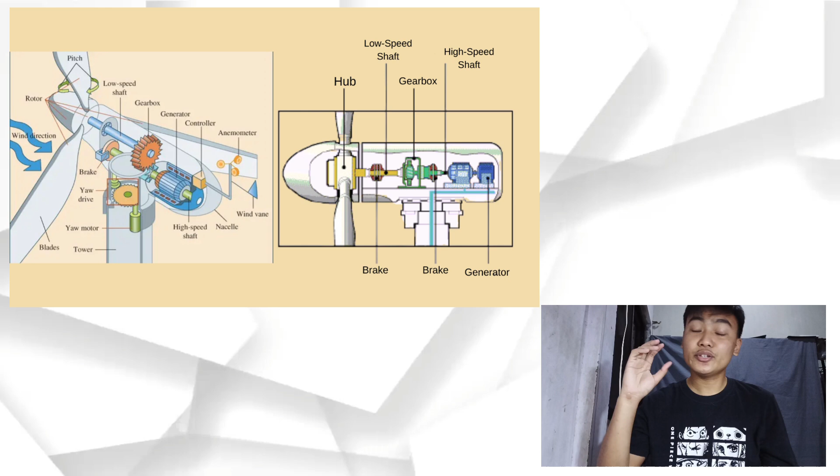Let us take a closer look at the wind turbine. We have here the rotor, which has these parts: the blades and the hub. The blades are connected to the hub, which is also connected to the nacelle part of the wind turbine.

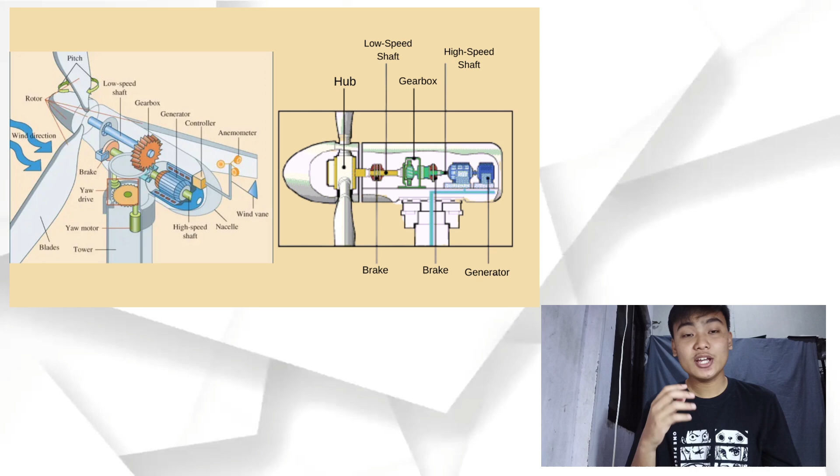If we zoom in and look closer at the parts of the nacelle, we could see clearly where it is connected to. Here is a close-up view of what is inside the nacelle. We have the hub where the blades are connected, and it is connected to a low-speed shaft which is connected along the gearbox, where the gearbox is also connected to another shaft leading to the generator, where the energy is produced in the wind turbine.

Let us talk about the wind turbine operating principle, how the wind turbine operates. As you can see, the wind turbine is a type of renewable energy. It means that the energy comes from natural resources, like the sun from a solar panel and the wind, which is in the wind turbine. That renewable energy that the wind turbine harnesses or gathers is what is produced as electricity.

So how does it work? The wind turbine uses a rotor, just like what I showed you earlier, where the blades are connected on the hub, and the blades are the ones that collect the wind. When the wind passes through the blades, it rotates. Basically, that rotation is transferred to a generator, which is connected along the shaft, that produces electricity. So that is the very basic concept of a wind turbine operation.

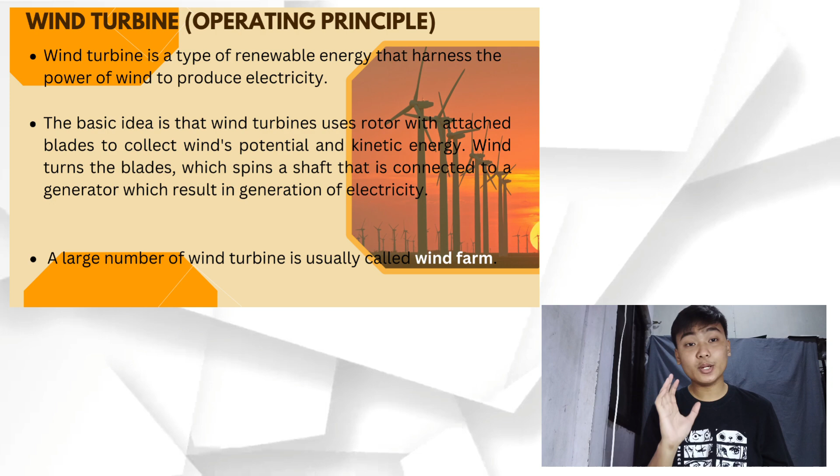Let us proceed more to the parts and operating principle of the wind turbine. Let us take a closer look at this image, isolate it, and discuss it one by one. Let us start with the very basic and main part of it, which is the blade. The blade is the part that rotates due to the force it catches. When the wind passes through the blade, it spins it, and the blade is connected to the hub, which is also connected through the low-speed shaft.

That low-speed shaft is connected through a gearbox, which amplifies the rotation that the wind gives to the wind turbine. Then there is another shaft called the high-speed shaft that is connected to the generator, where it spins the generator which generates electricity. That is how electricity is produced from a wind turbine, specifically from its part which is the blade.

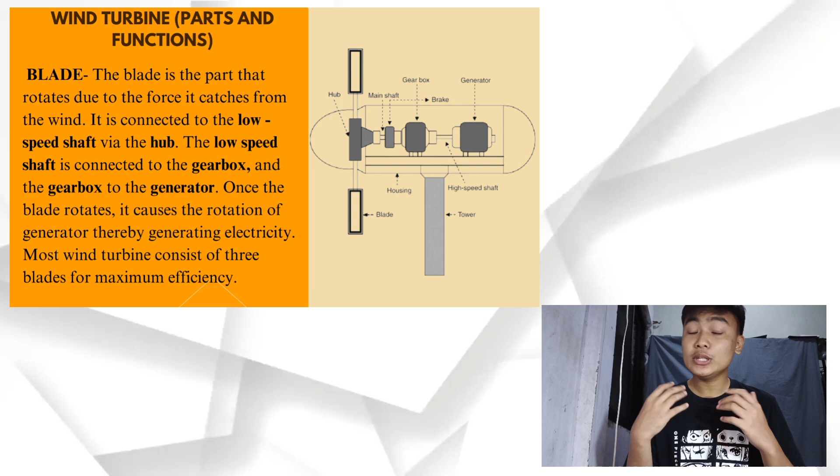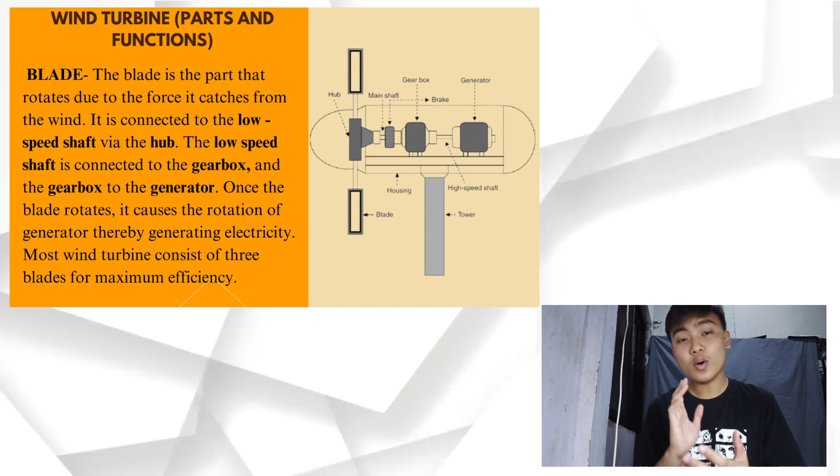And if we want the most efficient method of using blades in a wind turbine, we must use only 3 blades. So why is it? The next reporter will discuss why 3 blades is the most efficient maximum number of blades.

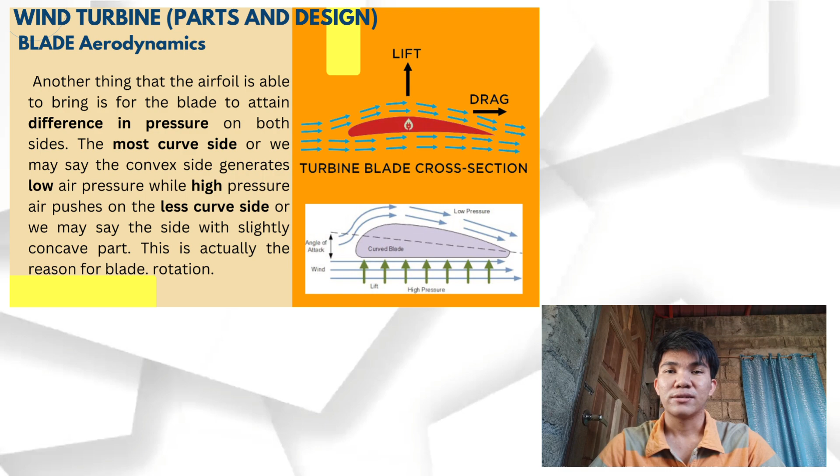So, here's the question. Based on the figure illustrating the optimum angle of attack, which part of the blade is the leading edge and the trailing edge of the blade? It could be the front or the back.

In the image, the leading edge is the curved forwardmost point of the airfoil. This is the part that initially meets the relative wind. The trailing edge is the rearmost point of the airfoil. This is the point where the airflow separates from the surface. Therefore, the leading edge is the front and the trailing edge is the back.

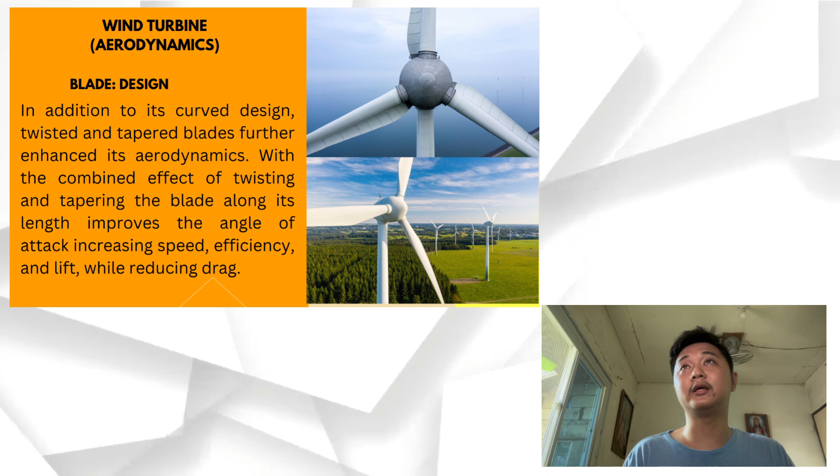Wind turbine number of blades. Here is now the question: based on the previous slides, what number of blades is the best design in consideration of all factors, construction and operation of the wind turbine?

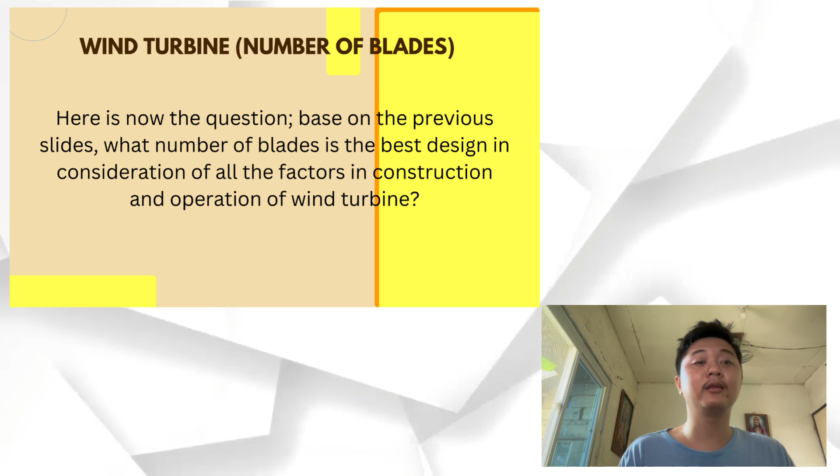Wind turbine number of blades. Now we know that the rear of the blade is more curved than the front. This varied shape causes a pressure differential as the wind moves across the blade, which causes the blades to move.

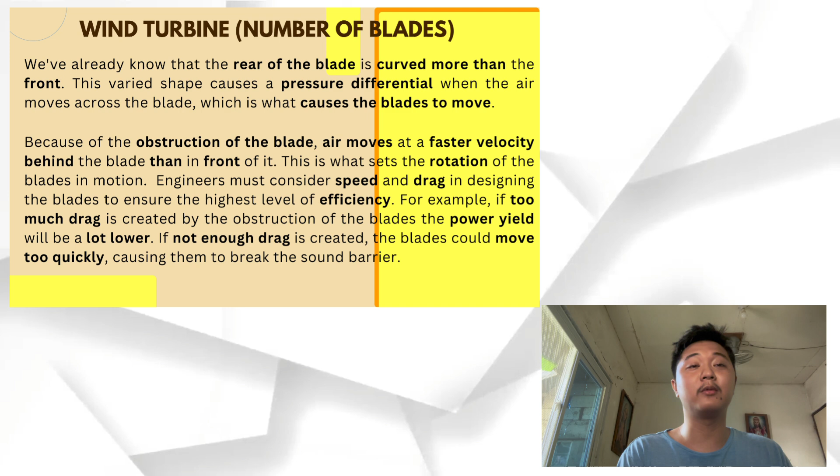Engineers consider speed and drag in designing the blade to ensure the level of efficiency. For example, if too much drag is created by the obstruction of the blade, the power yield will be a lot lower. If not enough drag is created, the blades could move too quickly, causing them to break the sound barrier.

Wind turbine, number of blades. The rule of thumb is the fewer blades, the better. Mas kaunting blades daw ay mas better since less drag and increase in efficiency. The number of blades increase the torque and reduces the optimum rotation speed. Having fewer blades reduce drag. Mas kaunti yung blades, mas kaunti din yung hatak.

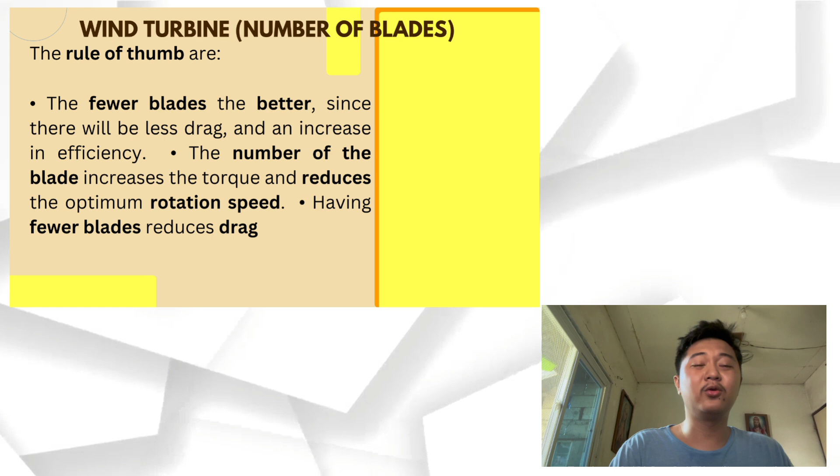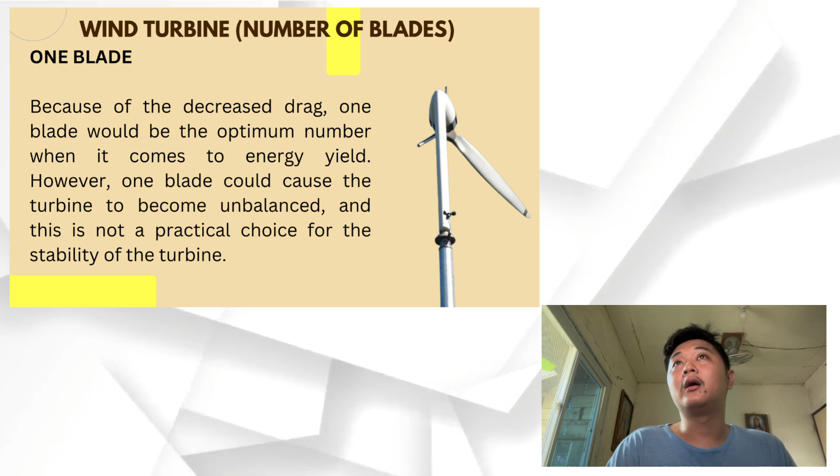Wind turbine, one blade. Because of the decreased drag, one blade would be the optimum number when it comes to energy yield. However, one blade could cause the turbine to become unbalanced. Kapag isang blade na turbine, mas unbalanced siya at hindi practical para sa stability ng turbine.

Wind turbine, number of blades, 2 blades. At first glance, two-bladed turbine seem like the optimal configuration for wind turbine. Perfectly balanced, and with one blade less than 3-bladed turbine, they will generate less drag. So why are not all turbines made with 2 blades?

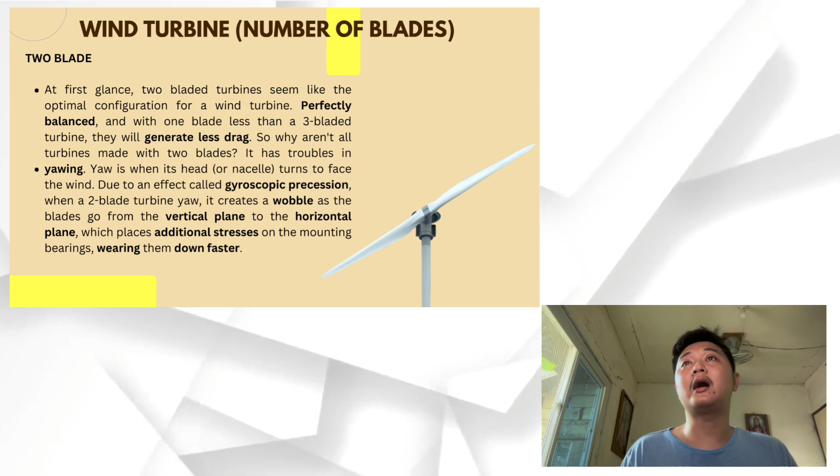Dahil may trouble daw ito sa yawing, and yaw is when its head or nacelle turns to face the wind, yung pagharap daw sa hangin, due to an effect called gyroscopic precession. When two-bladed turbine yaw, it creates a wobble as the blades go from vertical plane to horizontal plane, which adds additional stress on mounting bearings and wears them down faster. Mas nagkakaroon daw ng stress yung bearings ng wind turbine at mas nakakasira daw ito ng mas matulin kapag 2-blade.

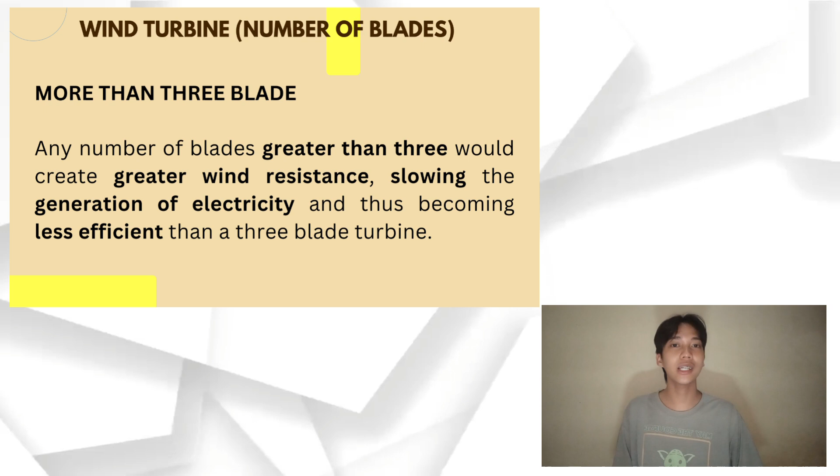So ano yung mangyayari kapag nag-add ng more than 3 blades ang turbine? Diba as mentioned earlier na the fewer blades, the better, since there will be less drag. So kapag nag-add ng blade, ang mangyayari ay babagal yung rotation. Yung drag force madadagdagan dahil may panibagong blade. So babagal yung ikot, makes the generator slower. Kapag mabagal ang generator, yung electricity na gine-generate ay mababa o hindi gaano kataasan. So less efficiency, hindi maganda na mababa lang yung power na nakukuha sa turbine. Parang nagsayang ka lang ng pera for the blade o for the turbine, tapos hindi naman maganda yung results. So hindi desirable ang maraming blade. For these reasons, turbines designed with 3 blades are the ideal.

Nasabing ideal yung 3 blades dahil mas stable o sakto o balanse yung blade sa pag-ikot, so make it more suitable for the turbine. Malay natin sa future, diba, mababasan pa yung blade o mas magiging ideal pa yung dalawang blade. Malay lang natin, diba, edi mas maganda, baka mas matipid o low cost yung aabutin.

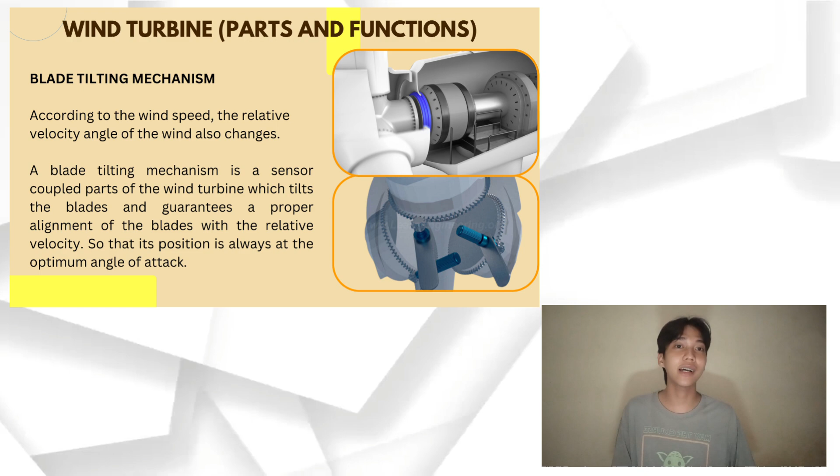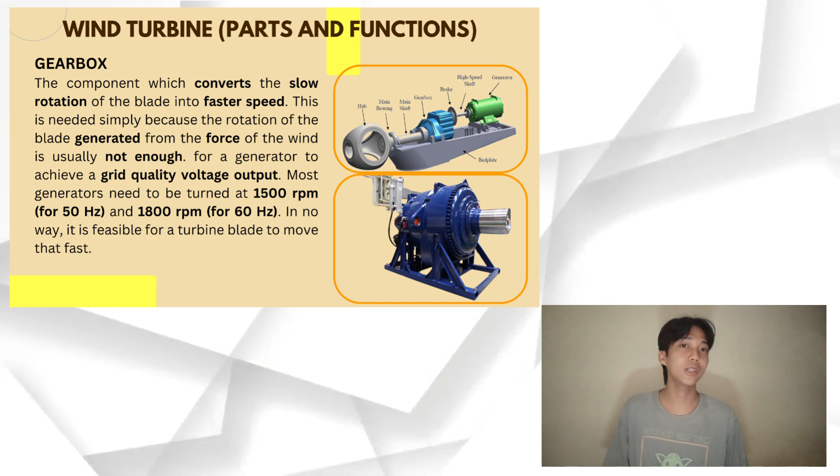Next, gearbox. Ginagawa ng gearbox ay kino-convert yung slow rotation ng blades into a faster speed. Kasi di ba yung ikot ng blade ng turbine ay di gaano mabilis. So ngayon, yung ikot ng shaft ay di enough for generator to achieve a grid voltage output. Most generators need to be turned at 1,500 RPM. So can you imagine kung gaano kabilis yung rotation na kailangan ng generator? Kung yung blade mismo yung gagawa niya, napaka-imposibleng mangyari. Ang laki ng blade tapos mabagal lang yung ikot na kayang gawin ng blade. So ngayon, dito na tatrabaho yung gearbox. Yung common ratio is about 90:1, so yung isang buong ikot ng blade, nagagawang 90 ikot ng gearbox with a rate of 16.7 RPM na input from the rotor, and yung output nito is 1,500 RPM na dadaan sa gearbox for generator.

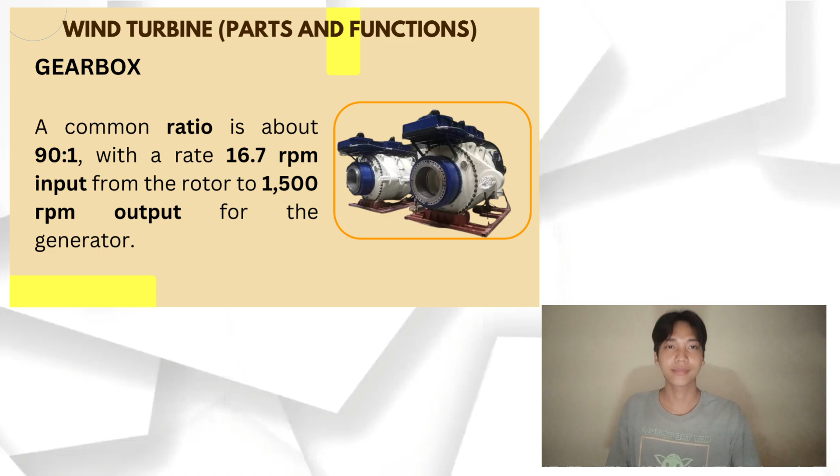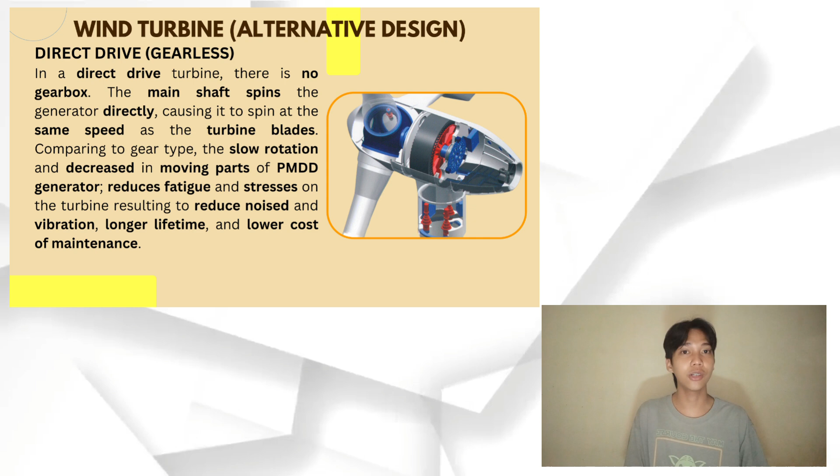Next is direct drive. Pinagkaiba lang nito is wala siyang gearbox, direkta na siya sa generator. So kung ano yung spin na nagagawa ng blade, yun din yung ikot na ginagawa ni generator. Comparing to gear type, the slow rotation and the decrease in moving parts of PMDD generator, dahil nga mas mababagal lang yung ikot ng shaft, yung lifespan ng turbine mas tatagal. Mas mababawasan yung noise, vibration, and stress, so it makes na mas mababa yung cost of maintenance.

An important fact, due to wind inconsistency, gear type turbine o yung may gearbox often operates at partial loads. So the efficiency of PMDD generator excels even in these conditions. Diba sa direct drive turbine, yung rotor nakadirektang nakakabit sa generator. Kung ano yung lakas ng hangin o yung ikot na nagagawa ng blade, is yun lang din yung ino-operate sa generator. So dito ngayon papasok yung magnet, dahil ang direct drive turbine gumagamit ng generator na may maraming magnetic poles. Nang sa ganon, yung mabagal na pag-ikot is sapat na to generate electricity.

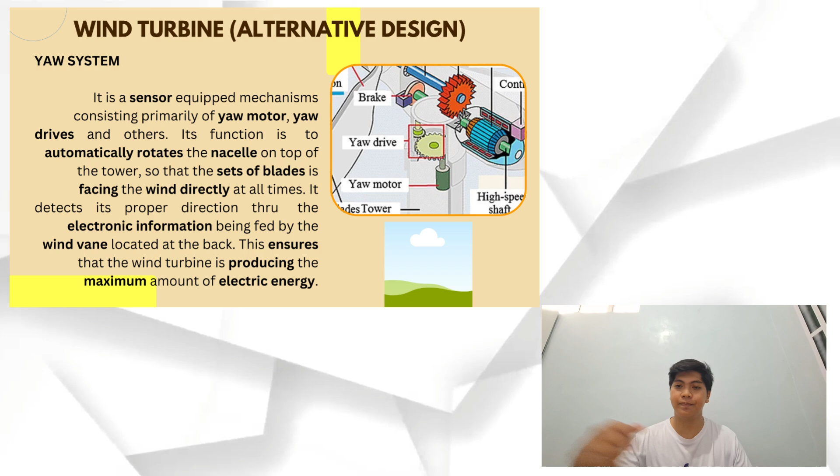How does a wind turbine work? You've probably seen a wind farm. But do you know how wind force is converted into electrical energy? We are going to show you how a wind turbine works.

Each wind turbine has a wind vane at the top that indicates the wind direction. This allows the turbine to rotate on the tower and face the wind. The blades also rotate on their axis for maximum resistance. Wind force, that is, the kinetic energy contained in moving air currents, spins the blades. These are designed to fully capture its energy.

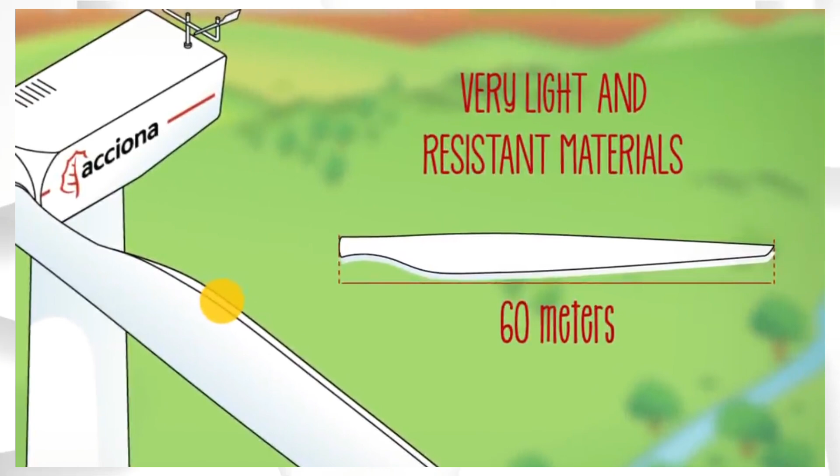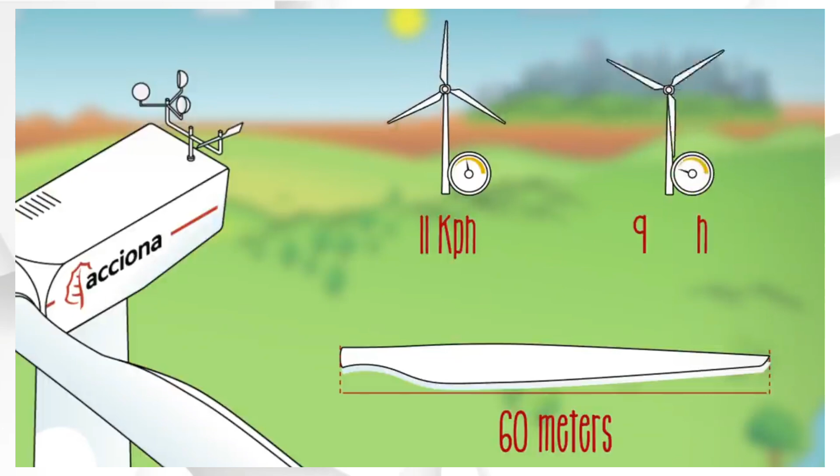They can be as long as 60 meters each and are made of very light and resistant materials for ease of movement. This is why they can produce energy even with very light winds, starting from about 11 kilometers per hour. With very strong winds, above 90 kilometers per hour, the blades are placed in the feathered position and the turbine stops spinning for safety reasons.

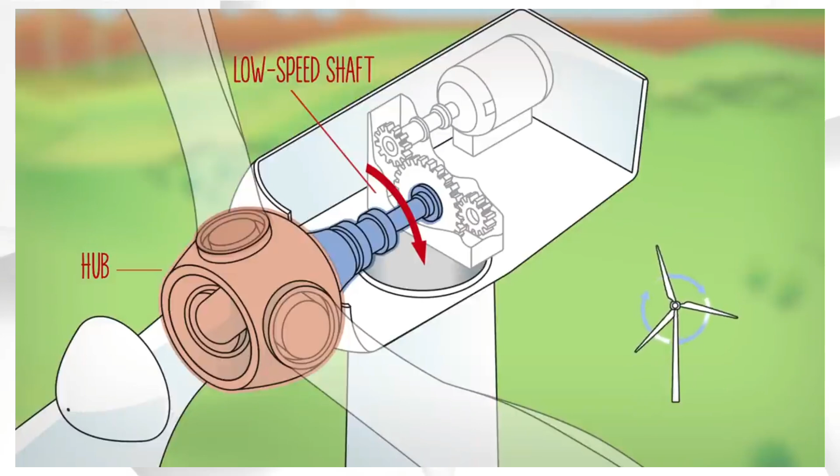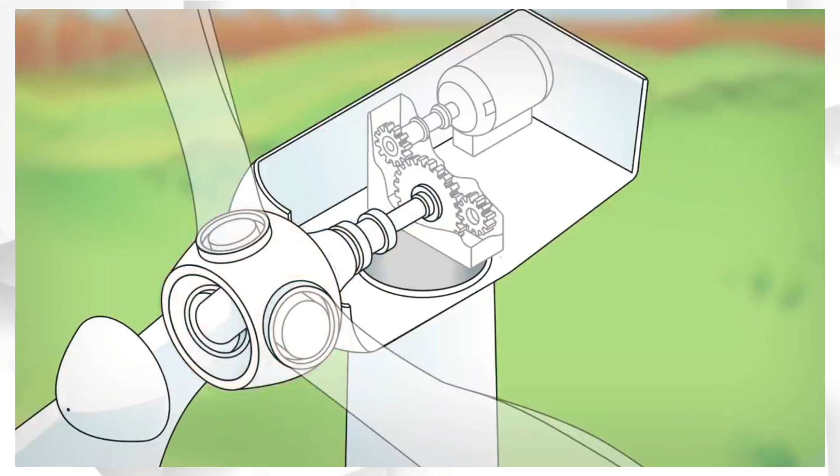The blades are attached to the wind turbine through the hub, which is coupled to the low-speed shaft. The low-speed shaft is given this name because it spins at the same speed of the blades, between 7 and 12 revolutions per minute. To produce electricity, it is necessary to increase the turning speed of the low-speed shaft.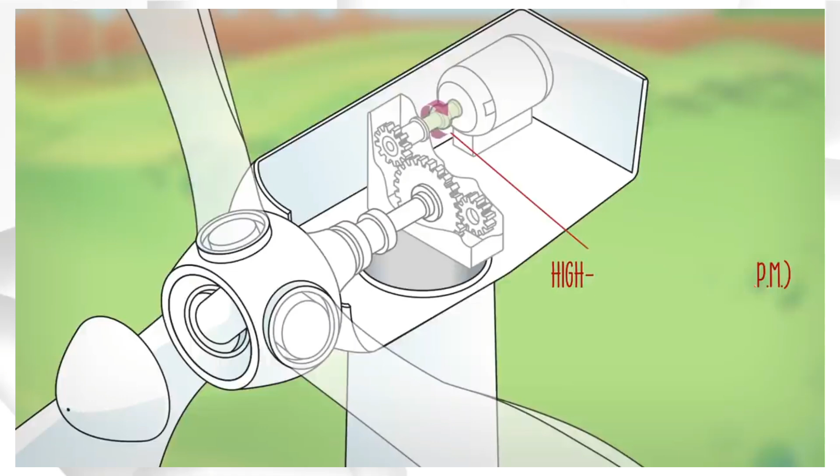That is the mission of the gearbox, which raises the speed over 100 times and transfers it to the high-speed shaft. The high-speed shaft, that rotates at up to 1500 revolutions per minute, is connected to a generator. The generator converts the kinetic energy into electricity, a source of energy that is easier to transport and use.

The electricity produced in the generator is conducted through the interior of the tower to the base. There, the transformer raises the voltage for transport inside the wind farm. From each turbine, alternating current is sent to the substation through underground cables. Here, the voltage is increased again to feed it into the power grid and transport it to end consumers.

This is how we use the wind to light cities, feed industries, schools or hospitals, or operate our household appliances in a clean way. So how did we get from this to this?

In some ways, the answer just boils down to climate change. We need way more renewable energy, so it makes sense that lots and lots of engineering and economic resources have gone into improving and enlarging windmills.

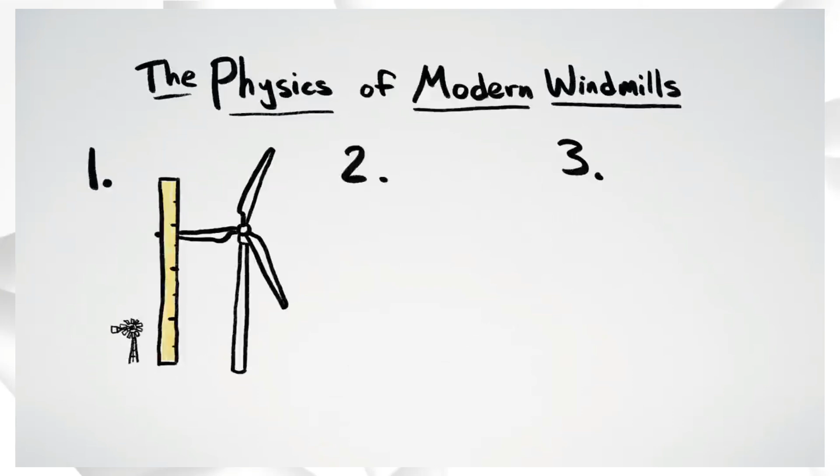But while climate change can explain why windmills have pushed towards really good design, it doesn't explain what makes a design good. I see three main features to explain: the size, the number of blades, and the shape of the blades.

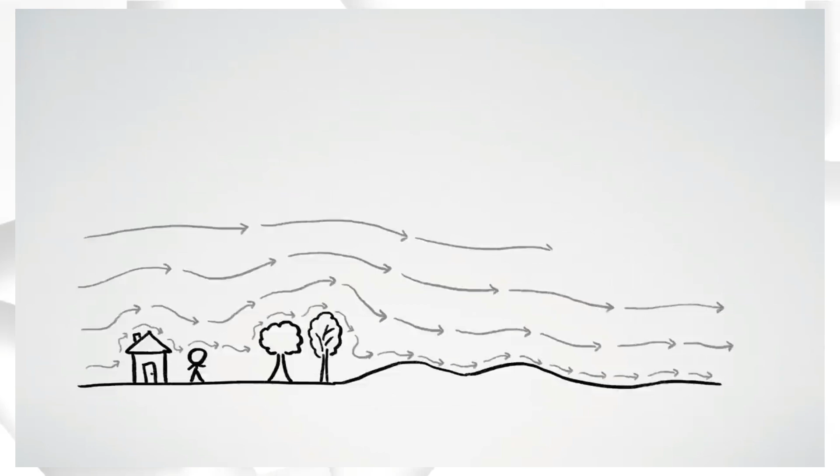Size is easiest. The bigger the area, the more wind you can use, and therefore the more wind energy you can capture. Plus, the higher up you go, the less the wind itself is impeded by stuff on the ground, the faster it blows, and therefore the more wind energy you can capture. So for a windmill to have access to air with a lot of energy, it should be giant and tall.

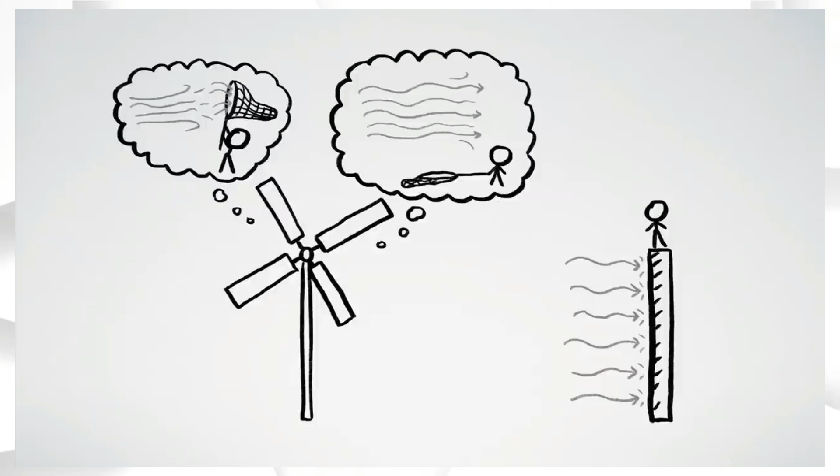However, a paradox of windmills is that they need to capture energy from the wind while also letting the wind pass. If you extracted 100% of the kinetic energy from the wind, it would stop moving and there'd be nowhere for incoming wind to go. So you have to let some wind through. Calculation shows that a mathematically ideal windmill can only extract 59% of the wind's kinetic energy.

Since windmills can't block the wind too much, they're faced with a trade-off: either have fast-moving blades that cover a small amount of area, or slow-moving blades that cover a large amount of area. This is because just as an airplane wing produces more lift the faster the plane is moving, a windmill blade catches more of the wind the faster it's moving.

So roughly speaking, a fast-moving windmill, like modern ones, needs correspondingly fewer, thinner blades in order to not slow the wind too much, while a slow-moving windmill can have more, wider blades. Obviously, modern windmills have gone with the narrow, fast approach. So why are modern windmills designed to spin more quickly than old windmills? If slower were better, there would be no reason modern windmills couldn't look like giant high-tech sails.

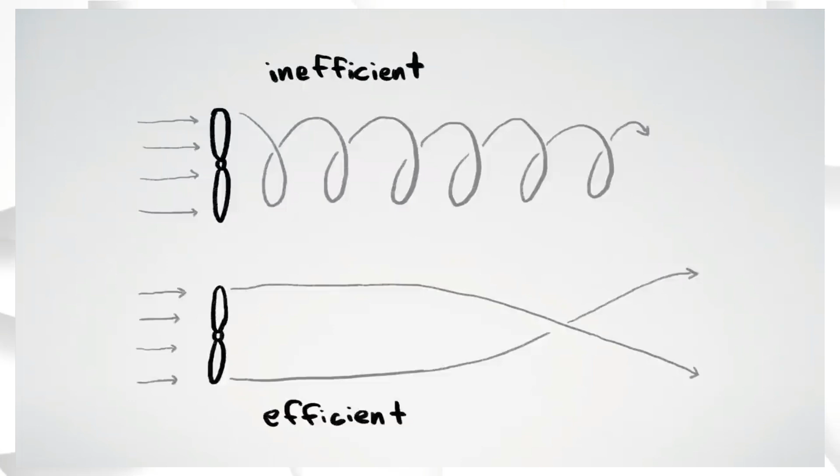The answer comes from Newton's third law. Just as the wind pushes the blades sideways to turn them, so the blades push back on the wind, giving the air a reverse twist and hence some rotational kinetic energy, which is energy the windmill doesn't capture. So the most efficient windmill will give the wind the smallest twist possible. And you guessed it, the faster a windmill blade moves, the less rotational energy it gives to the wind.

This might seem a little counterintuitive, but a similar thing happens when a ball falls and bounces off of an angled block. If the block isn't moving, conservation of momentum and energy mean that the ball bounces to the left and the block gets pushed right. But if the block starts off moving to the right, it's able to absorb more of the ball's energy when it accelerates. The faster the block moves, the more energy it extracts from the ball. You can see this because the ball moves less each time.

Windmill blades are a bit more complicated, but it's roughly the same idea. For decent efficiency, a windmill blade should move through the air at least 5 times faster than the incoming speed of the wind, though obviously different parts of the windmill blade are moving at different speeds, and so the shape varies along the length of the blade.

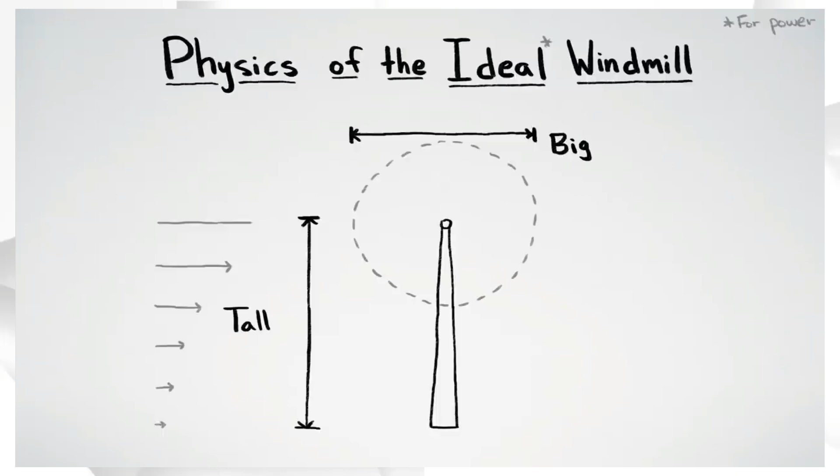So, in summary, an ideal power-generating windmill is big to capture a lot of wind, tall to capture strong winds, fast-moving to be most efficient, and narrow-bladed because a fast-moving windmill needs to have a smaller blade area, aka just a few narrow blades, to not slow down the wind too much.

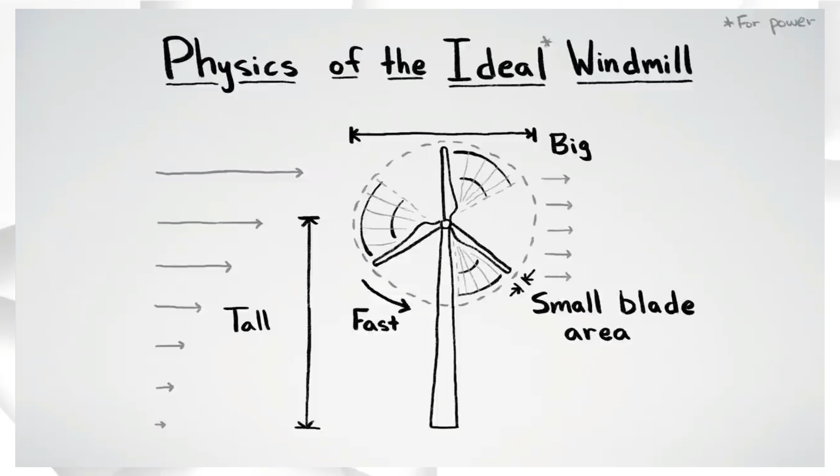Let's now talk about the wind turbine's tower. Wind velocity increases at a higher altitude. This means that the taller the tower is, the greater electricity it can produce.

Majority of wind turbines are supported by conical tubular steel towers with a height of usually 75 to 110 meters, depending on the blade's diameter. The tallest is still for completion in the mid of 2022, which is 280 meters, to be installed at the test center in Western Jutland, Denmark.

So the wind turbine tower is the one that supports the wind turbine's blades and nacelle, which houses the generator, gearbox, and other components. Its primary purpose is to elevate the blades to a height where they can capture more consistent and stronger winds.

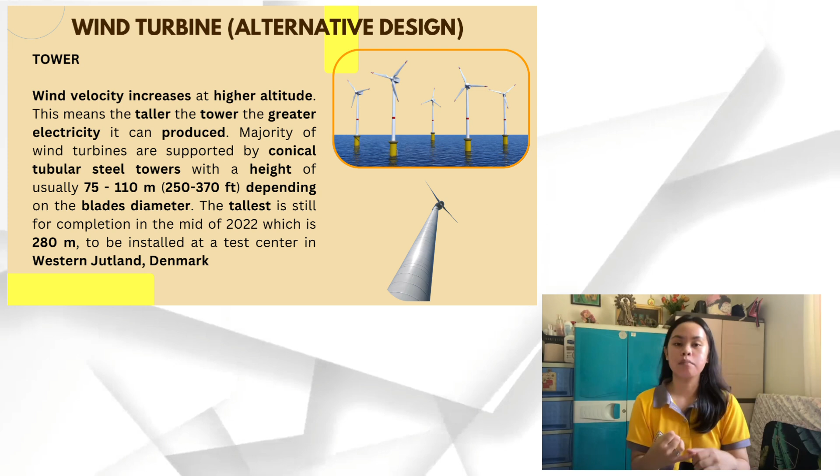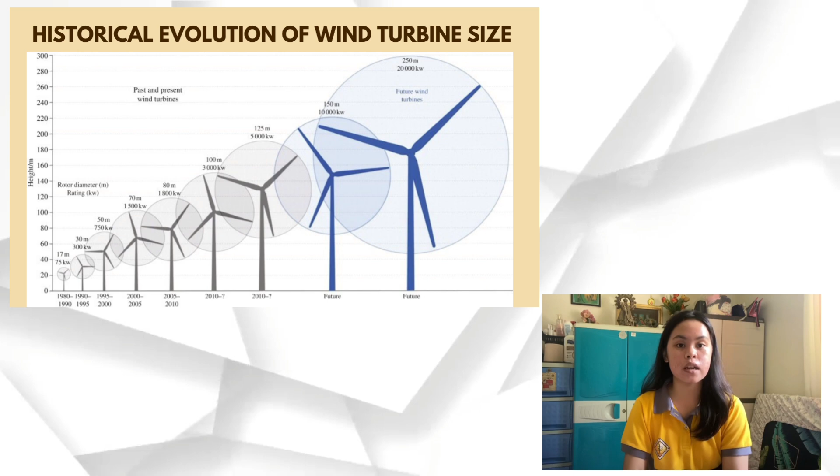The materials and the foundation. This picture depicts the historical evolution of wind turbine size. In 2024, construction began on the world's tallest wind turbine in the municipality of Schipkau in Brandenburg, Germany. This imposing wind turbine will reach a height of 364 meters, equivalent to a 120-story building.

The best places for wind farms are coastal areas, tops of rounded hills, open plains, and gaps in mountains, places where the wind is strong and reliable. Some also look offshore. When we say offshore, these are areas and bodies of water like seas or oceans that are away from the land. In the context of wind farms, offshore wind farms are wind turbines installed in the water, usually several kilometers from the coastline, since the wind is typically more consistent over water.

A wind speed of 25 km per hour is good for a wind farm.

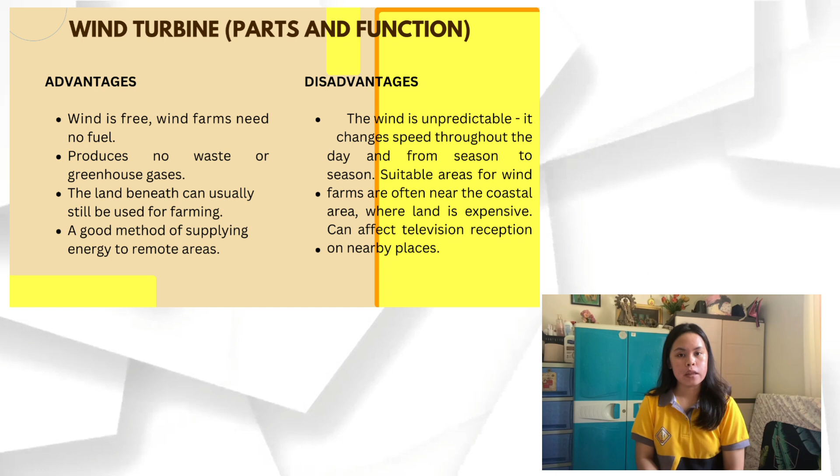Lastly, it is a good method of supplying energy to remote areas.

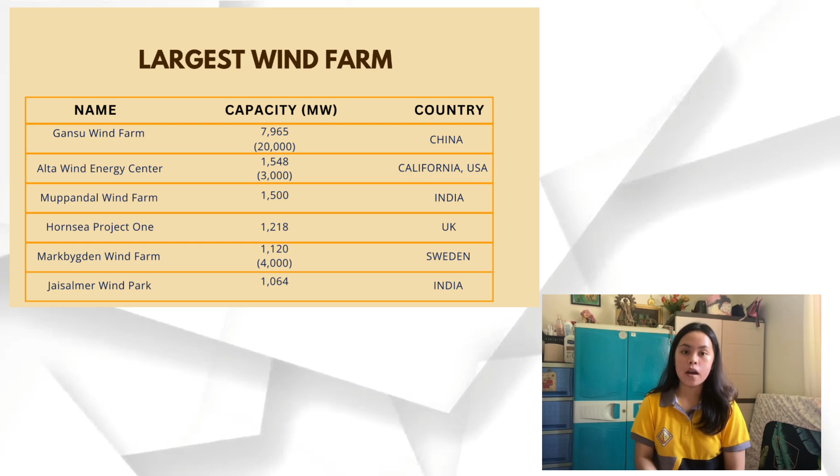So the following is the list of the largest wind farms in the world. First is the Gansu Wind Farm, which can be found in China, and as of 2025, its capacity is approximately 22,500 megawatts. Followed by the Alta Wind Energy Center, Muppandal Wind Farm in India, Hornsea Project 1, Markbygden Wind Farm, and Jaisalmer Wind Park.

Here is detailed information about the Gansu Wind Farm. Gansu Wind Farm is also known as Jiuquan Wind Power Base. It can be found in western Gansu province in China. In 2008, construction began on a 750 kilovolt AC power line to carry electricity from the wind farm, and in 2009, construction of the wind farms themselves officially began.

In November 2010, the first phase was completed. It involved the installation of over 3,500 wind turbines with an installed capacity of 5,160 megawatts, at an estimated cost of 120 billion Chinese yuan or 17.5 billion US dollars. By 2025, it has an installed capacity of around 22,500 megawatts, and it spans an area larger than some countries.

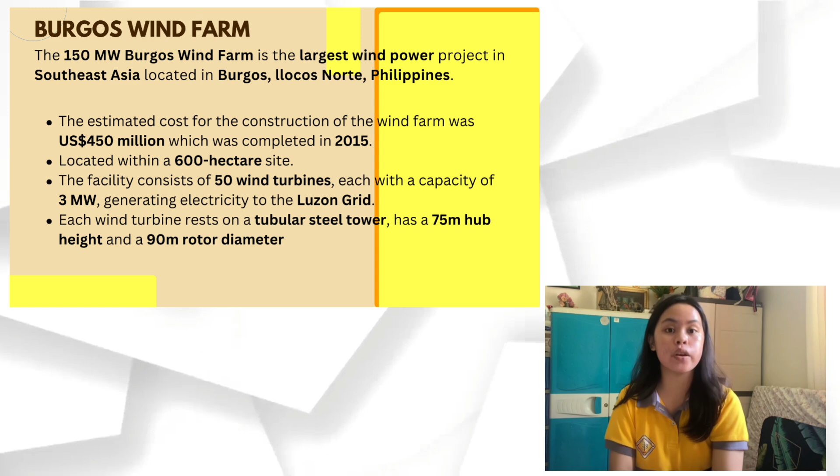The largest wind power project in Southeast Asia is the Philippines' very own Burgos Wind Farm, located in Burgos, Ilocos Norte. The estimated cost for the construction of the wind farm was 450 million US dollars, and it was completed in 2015 on a 600-hectare site. The facility consists of 50 wind turbines, each with a capacity of 3 megawatts, generating electricity for the Luzon grid. Each wind turbine rests on a tubular steel tower and has a 75-meter hub height and a 90-meter rotor diameter.